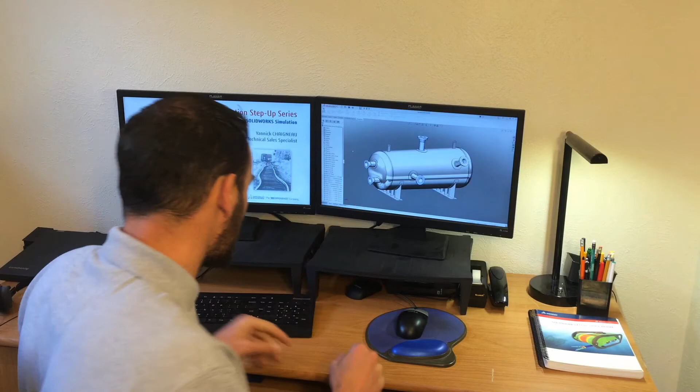I don't know about you guys, but when I think about material property, the first thing that comes to my mind is how stiff is this material. So when I look at those two spoons here, one is plastic, one is metal. Which one do you think is stiffer?

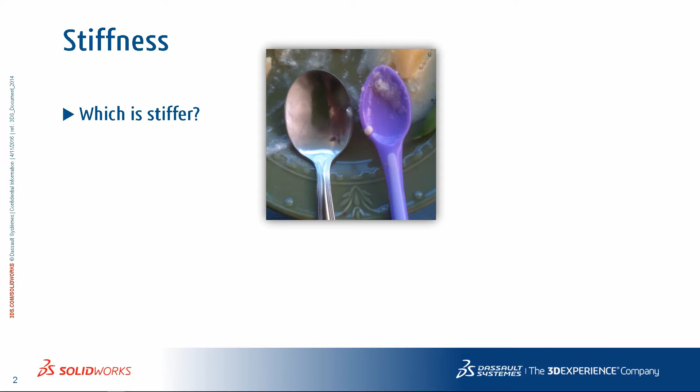Metal one, right? If I look at those three variations of the same parts, here are three metal rods. It looks like the one in the bottom has more material, so I'd say that's the stiffer one.

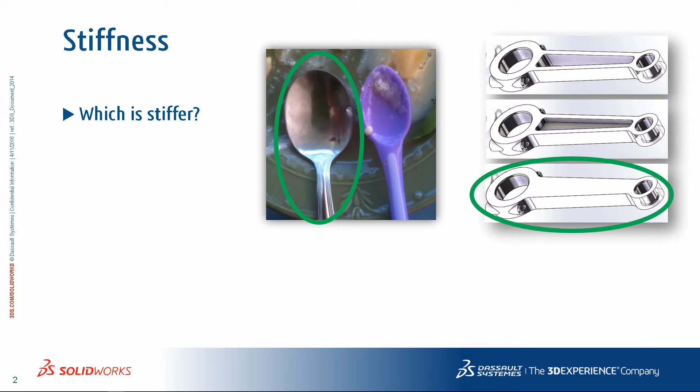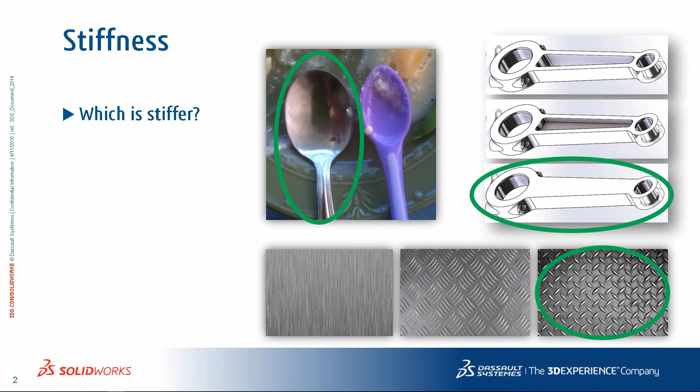Pretty obvious so far. If I look at those three metal plates, let's say they're all the same thickness and they're made out of the same material. I'll go with the right one just because of the features on the surface.

So as you can see from those examples, we're looking at geometric stiffness, which is due to the shape of the object, and material stiffness. I want to break that into two different categories.

So first of all, geometric stiffness. How stiff an object is really depends on its geometry. If you increase the wall thickness, it gets stiffer, or if you add ribs, it gets stiffer, and so on.

In finite element analysis, though, the geometric stiffness is represented by the mesh. So make sure you have an adequate mesh to represent your geometry, and the software should account for the proper geometric stiffness. Next is the material stiffness.

I'm sure we all understand that the material we use will greatly affect the behavior of our parts. Consider rubber versus granite, for example. Each material has its own physical properties, such as elasticity and density.

In finite element analysis, though, the material properties are assigned to the mesh, so using the material properties of the actual part can ensure we get accurate results out of the software.

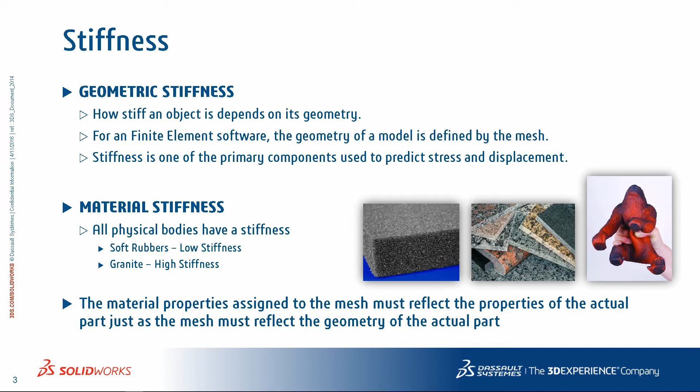The material properties needed for a static study would be different than the properties needed for a thermal or even for a fatigue study. Conveniently, though, our software helps you identify the important properties for each type of study, and that's the reason for the color coding in the material dialog box.

You'll notice that in red we put the properties that are absolutely required. In blue, they may be, depending on some of the effects that we want to account for. And in black are the properties that you definitely don't need for that type of study.

The material properties needed in SOLIDWORKS simulation can generally be put into two categories: the properties required to calculate the response, and the properties required to make sense out of the response.

The first category will be the input properties, property that you can either access from the material database or type in yourself as a custom material. And the second category will be the failure properties, like yield strength, tensile strength, fatigue strength. Those are used to make sense out of the software solution.

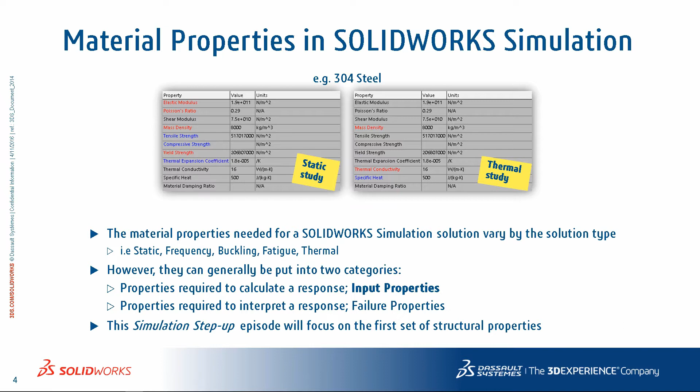In this simulation step-up episode, I will focus only on the input properties needed for a linear static solution. For static structural analysis, SOLIDWORKS simulation provides for inputting the elastic modulus, the Poisson's ratio, the shear modulus, the density, and the coefficient of thermal expansion, or CTE.

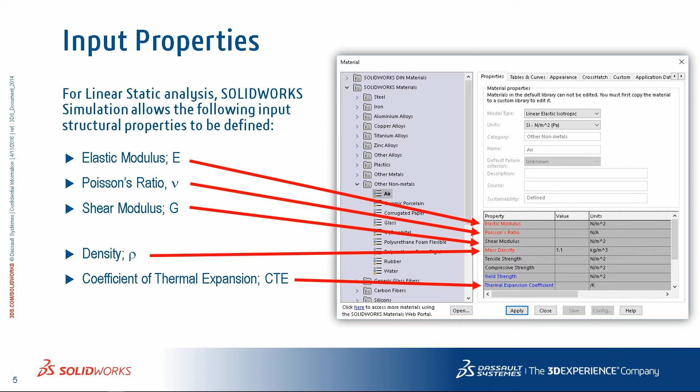These are properties you have seen in training or used in the past, but I think it's important to have a good understanding of what they really mean, where they came from, and how they can vary from part to part or material to material.

A lot of material property information can be obtained from a stress-strain curve, so let's take a closer look at it to understand its various components.

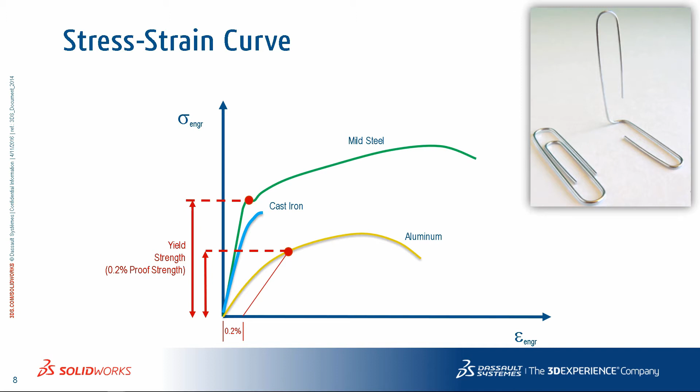Finally, you notice that the stress-strain curve is a straight line at the beginning. The slope of that initial portion of the curve is your elastic modulus, also known as the Young's modulus. In the absence of a straight portion of the stress-strain curve, which is often the case with plastics material, we'll use the first 2 data points from the tensile test to generate the slope.

Next, I'll be talking about the tensile test itself that is used to obtain the stress-strain curve. But before I advance the slide, note that the slope or elastic modulus can vary greatly from material to material.

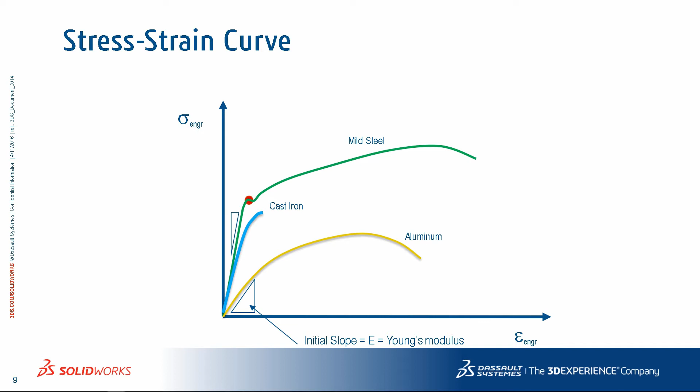The standard tensile test for metals is the ASTM E8 tensile test. It uses a round sample that is mounted to a rigid base on one end and connected to an actuator on the other end. The machine will then stretch the part and measure the force required along the way.

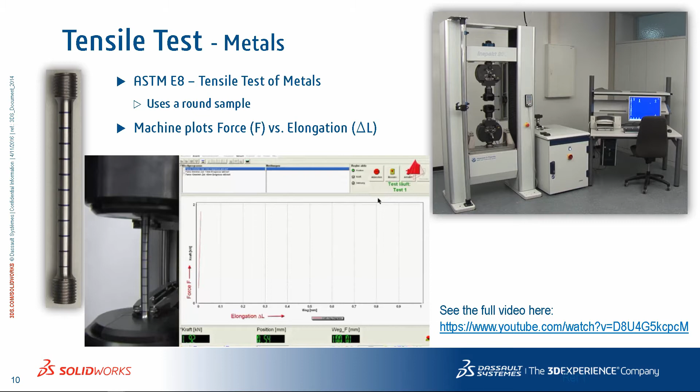Here's an accelerated version of that test. First, you notice the strain gauges connected to the sample. Then we'll look at the computer screen and basically start stretching that part vertically along the axis.

You'll notice the straight portion of the curve, the dip, and then as we keep pulling, take a closer look at the image. It's pretty obvious right now. You'll notice that the material is stretching and the force required goes up, but all of a sudden, the force levels out. And when it starts going back down again, this is when the necks start forming.

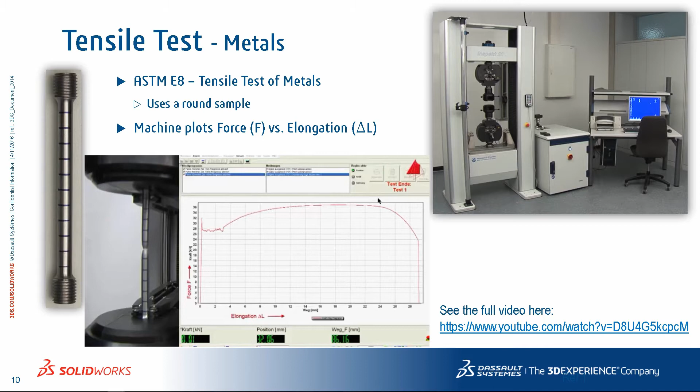It's the onset of fracture. And all of a sudden, bang, the part breaks.

So we get a force versus deflection plot out of the tensile test, but it will look exactly the same as the engineering stress-strain curve, because the engineering stress is simply force divided by the original cross-sectional area, which is a constant, and the engineering strain is simply the elongation divided by the original length, which is also a constant. All that makes the engineering stress-strain curve look the same as the curve we had earlier.

So if you were to use the true stress-strain curve, though, which uses the Poisson's ratio in the elastic portion of the model to account for the exact cross-section at that given moment, the curve would look significantly different, especially past the yield point once the neck starts forming.

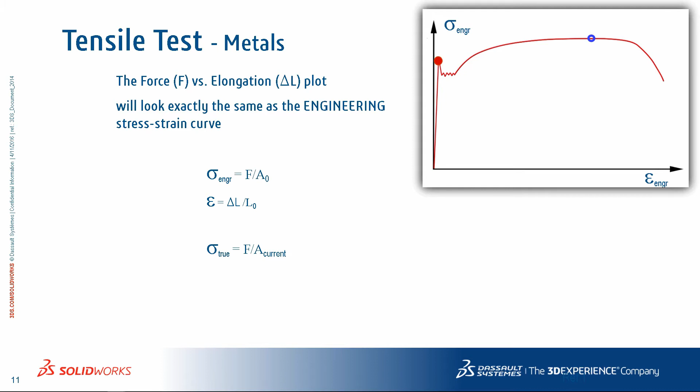For plastic materials, a different spec, ASTM D638, is required to determine the tensile properties for the stress-strain curve. Unlike the metal test, the samples used for plastics are flat or dog bone shaped, where they are thinner in the middle and much wider on the ends to hold the part.

Because plastics are inherently very nonlinear, where they start to deviate from linear almost immediately, the elastic modulus is typically defined as the initial slope between the first couple data points in the test. So the Young's modulus is only applicable for a very small amount of strain, so that needs to be taken into account if you are going to use plastics material for linear static analysis in SOLIDWORKS simulation.

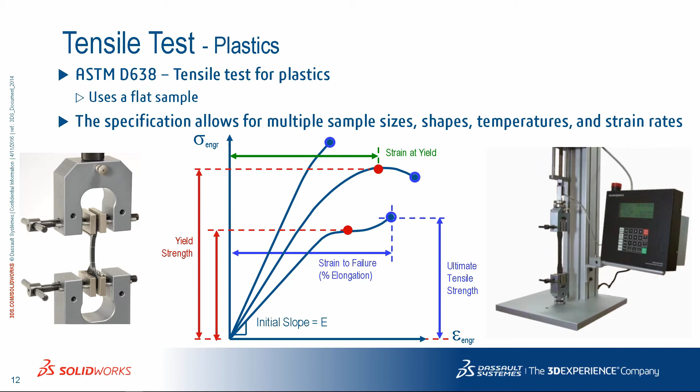At larger strain, you will start seeing noticeable differences between software results and actual tests, and you need to be aware of that. More specifically, regarding the Young's modulus, it is represented by the letter E, and as I said before, it is the slope of the linear portion of the stress-strain curve.

For steels, the slope is always linear up to the yield strength of the material, but for other materials, that's not always necessarily so true.

Remember that the tensile tests represent the strength of the material in tension. Many materials are symmetric, meaning that their tensile properties are the same as their compressive properties. But that's not always true, especially if you're dealing with brittle materials.

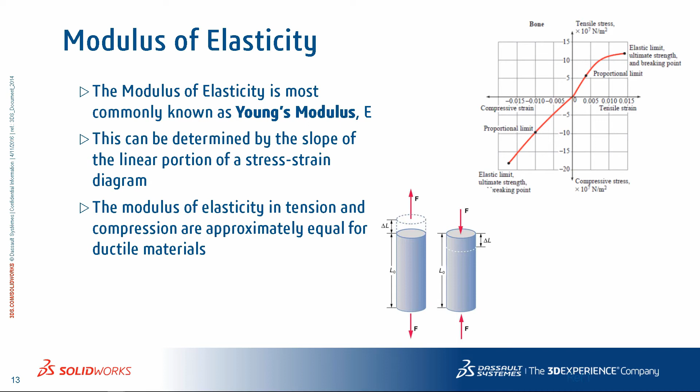So if you're in this situation, you might want to consider a more advanced material model available in SOLIDWORKS Simulation Premium to predict the behavior accurately.

How does Young's modulus vary in engineering practice? Typically, with steels and with other engineering metals, the Young's modulus will remain consistent across varying alloys.

For steel, the Young's modulus will be around 30 million psi, or 200,000 megapascals. For aluminum, it's usually around 10 million psi, or 65,000 megapascals. Various alloys will come and go, but the stiffness of those alloys is going to be consistent.

What will be different is the failure characteristics of those materials, so that's what you should be paying attention to if you think using a stronger steel will improve a dangerous stress situation.

Remember though, this is not necessarily true for other materials, particularly plastics, where the Young's modulus can vary greatly based on the molding process. Also, especially for plastics and polymers, it can be extremely sensitive to changes in temperature or strain rate—by strain rate, I mean the speed at which the part is being loaded. At lower temperature, plastics tend to behave more stiffly, and at higher strain rates, plastics tend to behave more stiffly as well.

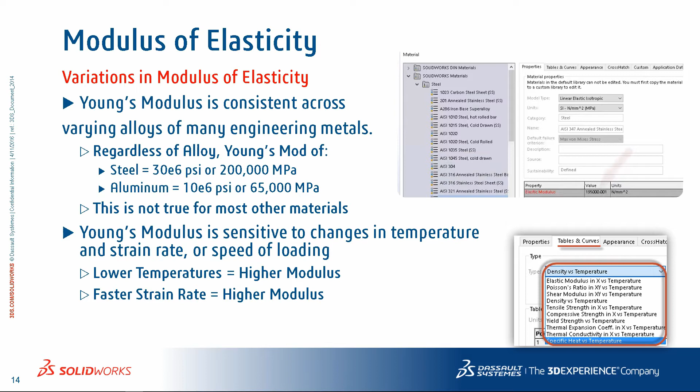That characteristic is true for engineering metals as well, but the variation is not nearly as obvious as it is for plastics. If your application involves making your parts work at temperatures other than room temperature, you might want to consider entering the temperature dependence of your material property in the material database.

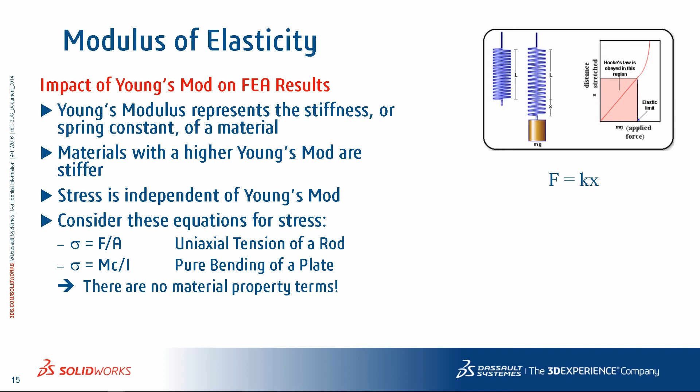How does varying the Young's modulus affect your FEA results? Remember that the Young's modulus represents the stiffness of your material. As an analogy, if you consider your part to be a spring-mass system that behaves according to Hooke's law, F equals kx, then your Young's modulus is the spring constant k.

Consequently, you can say that deflection varies linearly with Young's modulus. So for the same geometry and the same loading scenario, an aluminum part will deflect more than a steel part by a factor of 3, since the Young's modulus of aluminum is 3 times less than that of steel.

As for the stress, it will be exactly the same regardless of the material. This is sometimes a statement that's hard to believe. This is because stress is independent of Young's modulus. To help you understand that better, here are some basic equations for basic stress tests in engineering structural analysis.

For uniaxial tension of a rod, the stress is simply the force over the area. For pure bending of a plate, the stress is the moment times the outer fiber distance divided by the cross-sectional moment of inertia. Notice that in none of those equations do you find Young's modulus or any other material property term, because stress is independent of material properties. That doesn't mean failure is independent of material property, but stress is.

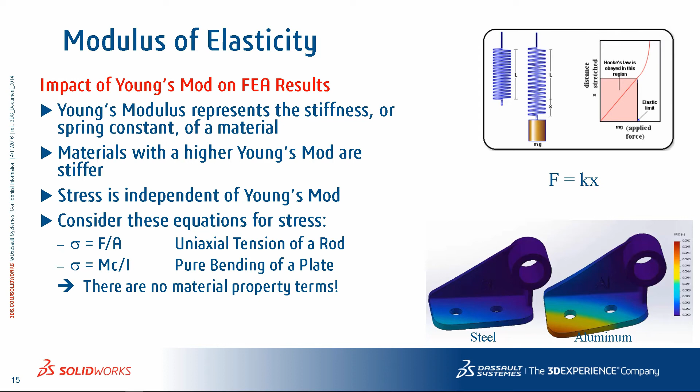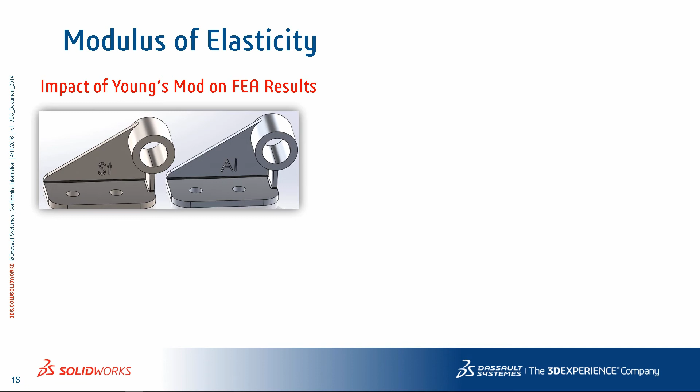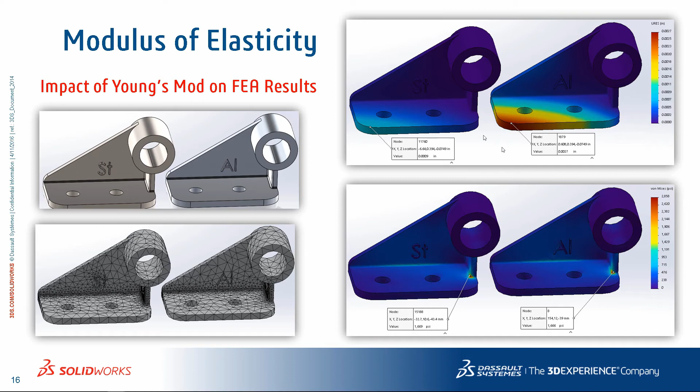Let's take a look at a side-by-side comparison of two materials to illustrate what we just discussed. Steel has a Young's modulus of 30 million psi, which is 3 times stiffer than aluminum at 10 million psi. So for a given geometry and a given load, an aluminum part will deflect 3 times more than the steel part. As for the stress, it will be exactly the same regardless of the material. So consider this if you're thinking about using a different material to alleviate stress in your design.

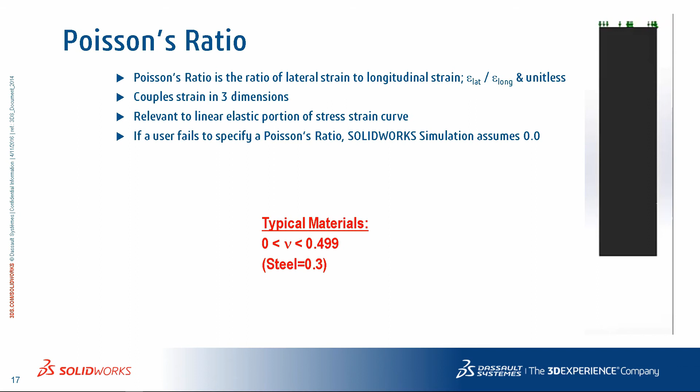Poisson's ratio is another input property for static analysis, essentially the ratio of lateral strain to longitudinal strain. As you can see on the exaggerated animation on the right, when a bar is loaded in pure tension, the cross-section or lateral dimension reduces by a factor related to the Poisson's ratio. A load is applied in one direction, but it couples the deformation in the other two directions.

Values for Poisson's ratio for all materials that exist are always between 0 and just under 0.5, as 0.5 would result in numerical singularity. So realistically, Poisson's ratio is in the range 0 to 0.499 in the linear elastic portion of the material curve.

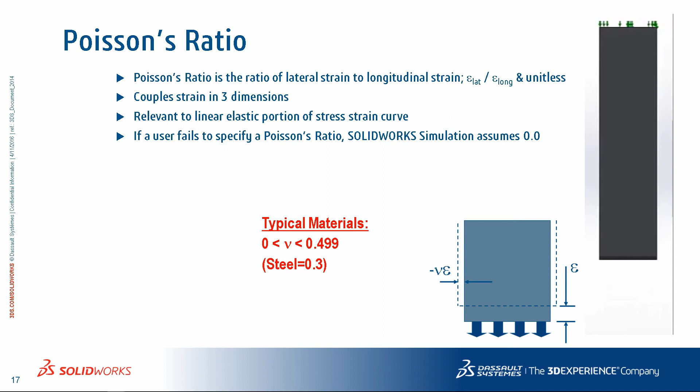I'm pretty sure you've all seen the effect of Poisson's ratio in your analysis. Just fix a block on one end and pull on the opposite end. The high stress at the restraint is due to the Poisson's ratio and the fact that the material is not allowed to shrink in the lateral direction due to the artificial condition on the face. Stress there should be ignored, or a more appropriate set of constraints should be used to eliminate this anomaly.

For steel, Poisson's ratio is usually 0.3, and it's a good number to use if you don't have a value for your material. If you forget to enter the Poisson's ratio, note that SOLIDWORKS Simulation will warn you that a value of 0 will be used.

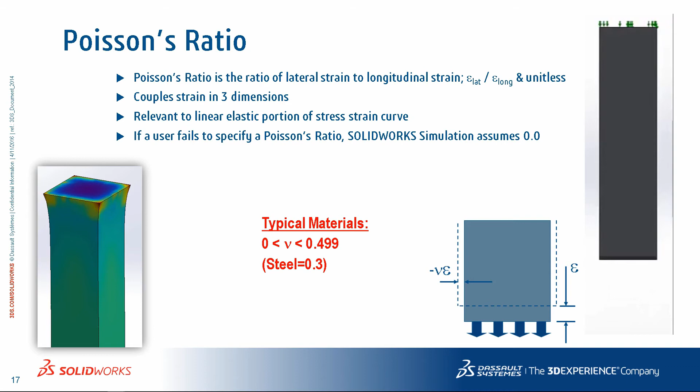Now, how big of an impact would this have on your results? To find out, we ran 5 cases where the only variable was the Poisson's ratio.

The results showed that the displacement and von Mises stress vary by only 4%. So we can conclude that Poisson's ratio has only a small impact on the overall solution, certainly well within the error introduced by local mesh problems. If on top of this, you account for the fact that Poisson's ratio for the vast majority of materials is between 0.2 and 0.4, and if you use 0.3 as your default guess, the potential error you're introducing would be 2% at most.

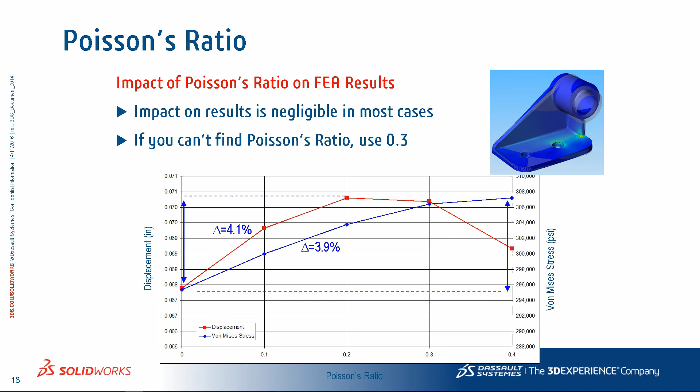Shear modulus is another one of the input properties for static analysis and is linearly related to the Young's modulus and the Poisson's ratio by the equation you see on the screen. Since you can calculate the third property using the other two, the shear modulus is pretty much redundant.

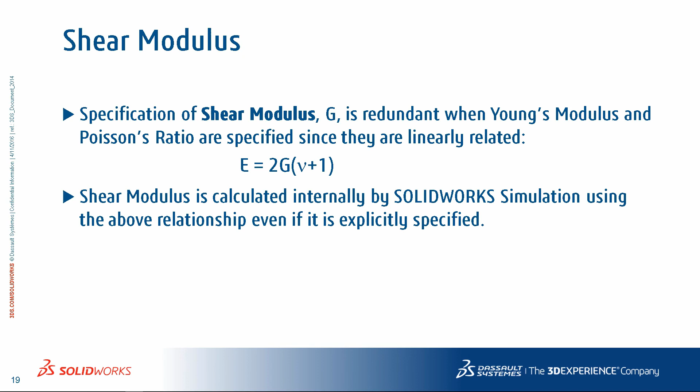Density is only required if you're performing either frequency analysis, or if you're doing a static analysis and are specifying either gravity, acceleration, or centrifugal load in your model. Because those are acceleration loads and they need a mass to act on, density is the way mass gets calculated. By definition, mass density is the ratio of mass to volume.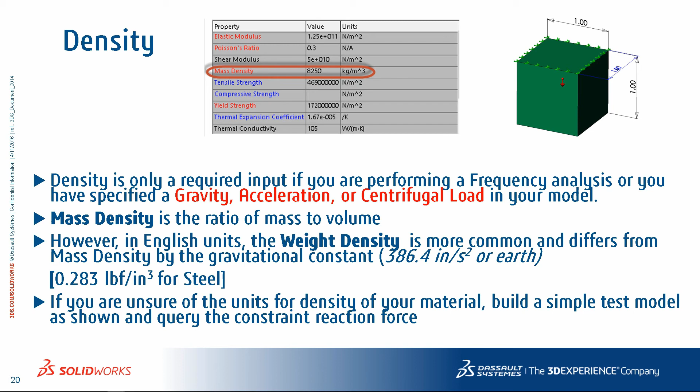However, in English units, the weight density is more common and differs from the mass density by the gravitational constant. If you're creating your own custom material and unsure of the units for density of your material, build a 1-inch cube, fix it at the top and assign gravity, and query the reaction force at the location of the restraint. That force should equal the weight of the part, and use this as a sanity check to make sure that your densities enter correctly.

The coefficient of thermal expansion, also known as CTE, is the last input property we'll cover today. It indicates how much a material expands and contracts when subjected to a temperature change. This property is only required in a linear static analysis if you're going to evaluate stresses and deformation due to thermal expansion. Typically, the setup would require one to apply a thermal load, not to calculate temperatures, but rather to determine stresses and deflection relative to a baseline, which typically corresponds to ambient temperature.

This material property can be found in a number of resources and can make a pretty significant difference in your results. So if you're going to solve this type of problem pretty regularly, we do recommend you look for the coefficient of thermal expansion specific to your material instead of using the one from the database, which could be considered a little more averaged.

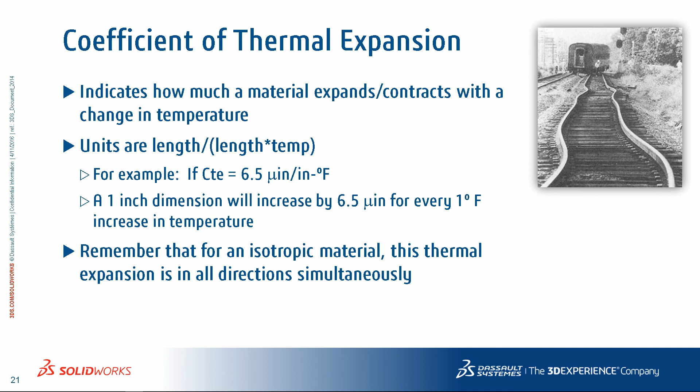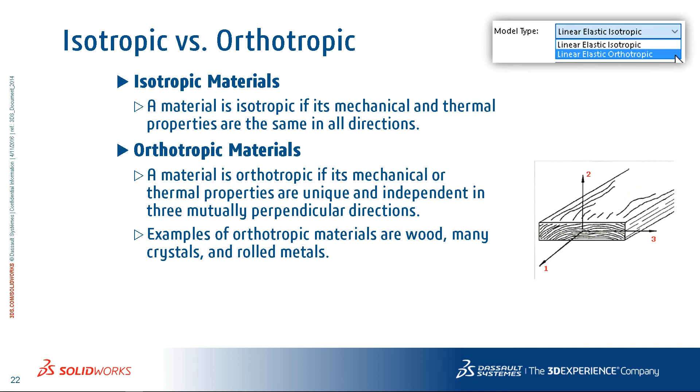This chapter would not be complete without a closer look at the difference between an isotropic and an orthotropic material. The standard default material in SOLIDWORKS simulation is isotropic, meaning all the properties are basically the same in all directions. Many materials don't behave that way though, and they fall into the orthotropic or sometimes anisotropic category. Wood is a perfect example of an orthotropic material, as the grain affects its behavior and strength.

Also, I wanted to point out that if you're looking to find properties for a specific material, you can use our Matereality library, which is accessible from a hyperlink at the bottom of the material dialog box. It's a pretty extensive online material library that's only for simulation professional and simulation premium users on subscription, and it contains thousands and thousands of certified materials from reliable sources. As a matter of fact, you can check the data certificates. And the nice thing is you can really filter by study type and also material type, whether it's a plastic, a rubber, or a type of metal.

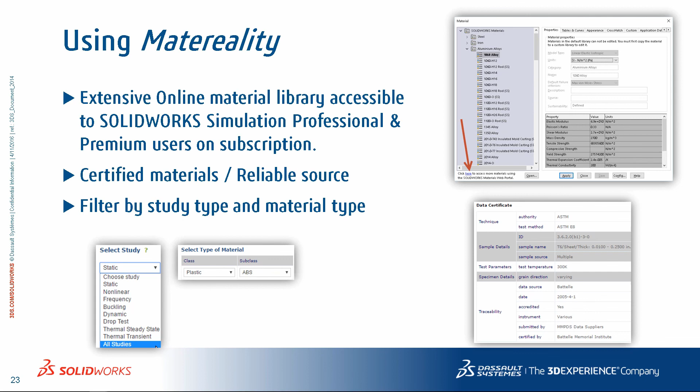In the simulation step-up episode, we basically explored the input properties required for linear structural analysis in SOLIDWORKS simulation. We reviewed the basic test method for tensile testing, and we also discussed the impact of property variation on your analysis results. If you want to know more on the subject of material in analysis, I would recommend you contact your SOLIDWORKS reseller and maybe consider an in-depth training on the subject to become a real expert.